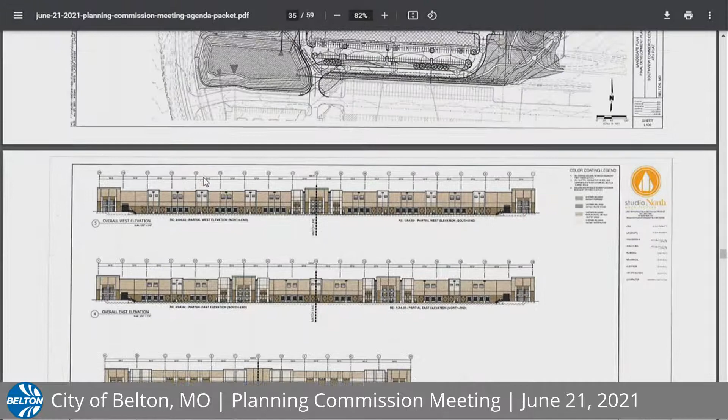The landscape plan is a very attractive portion of the final development plan. A major element is a landscape buffer on the adjoining Tract 5, which is a later agenda item this evening, but these are also integrated together - I'll talk briefly about it now. This proposed Tract A in Lot 5 provides screening and separation from the single-family homes to the east.

The buffer detail here shows the buffer meanders throughout that tract. It's a 10-foot buffer planted with evergreen trees, shrubs, and sections of 6-foot cedar fencing, essentially the same buffer and landscape design you see in other portions of Southview Commerce Center. The landscape plan also designates areas of existing trees to remain at this location as an existing natural buffer.

The landscape plan also provides required shade trees in the parking lot islands, and landscape planting around the foundations of the building. The final development plan also includes an 8-foot multi-use asphalt trail.

That trail has connections to the building. It's difficult to see here on the plan, but there's a connection here. The trail comes at this location, nicely separates the detention basin from the buffer, comes down to this location, connects back to the residential plat, which we'll talk about later on the agenda, and proceeds west, tying back into the existing trail north of Building 3. So that provides desirable connectivity throughout the office park and to the residential area.

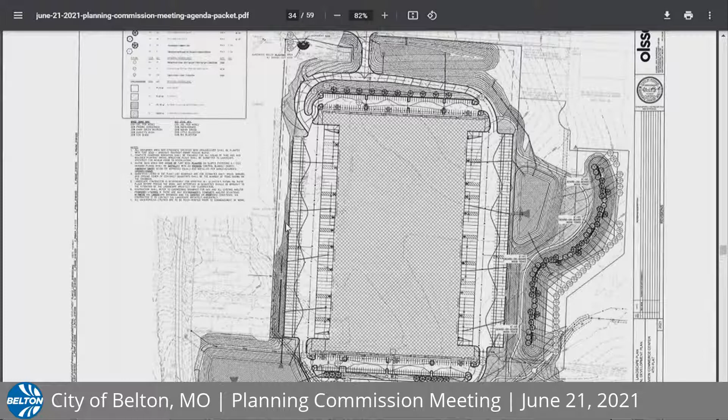Well, I got a comment. Back in—and correct me for going into the history—but back in 2018, there was the original plan for North Point.

There were 5 buildings, and there was a noise survey based on that, and they were arranged differently, now arranged as 4 buildings in a row. In that original plan, there was a noise survey report done by Kimley Horn, and they noted that Belton had required 55 dBA LEQ. That's a noise level, just like a speed limit—55 at the fence line. Their map showed that with that original configuration, the max was 53.6.

So they said we met Belton's requirement. Even though the requirement isn't in the UDC or the COO, it is a requirement. Dave and I have talked a lot about the requirement. I think it came from Olathe, and they use it only as a daytime level, not a nighttime level. Their nighttime level is 50, but be that as it may, we gave them 55. They met 55 with the original layout.

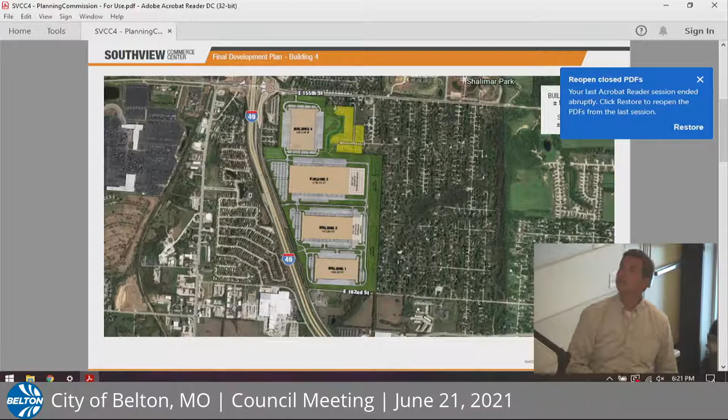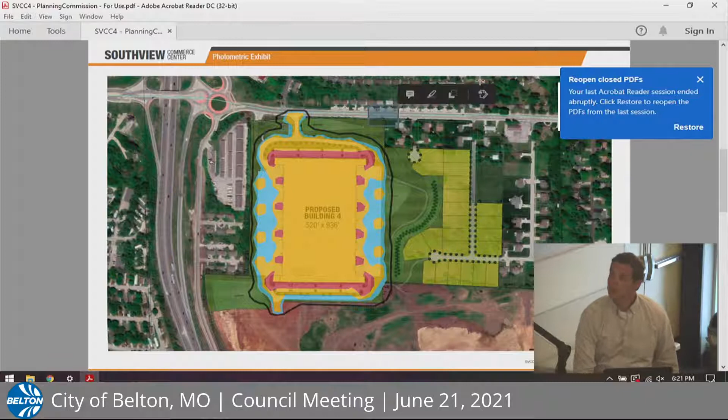Mr. Clements noted the photometric study. We presented a photometric study in response to the PDP. This is a more graphical, artistic version of what's represented by that photometric study. Let me close these things so you guys can see. The red areas are greater than 2-foot candles, on the north side, south side, and each of our building lights. Then it decreases to around 1-foot candle, and continues to drop as we approach the property line. This black line, entirely within our property lines, represents the 0-foot candle line.

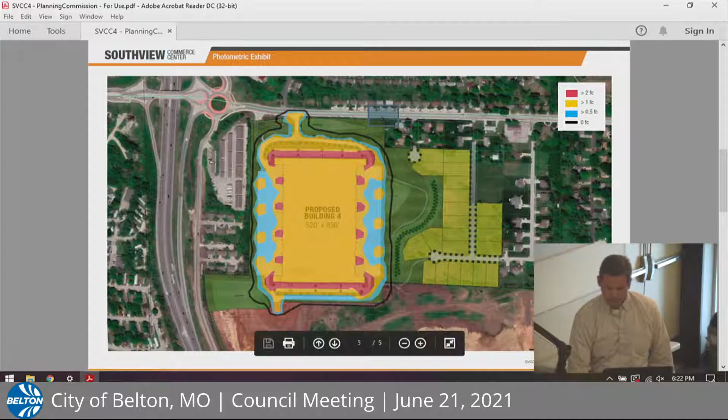So this is the plat. I don't know, Councilman, if you wanted to see the proximity, but that shows the existing situation. So, generally, to Mr. Clements' point, this is very, very similar, if not the exact same, as our previously approved PDPs, both through the commission here and through City Council. We've provided additional information regarding the photometrics, the light information on the building, and the different engineering studies for approval as well. So I stand for questions.

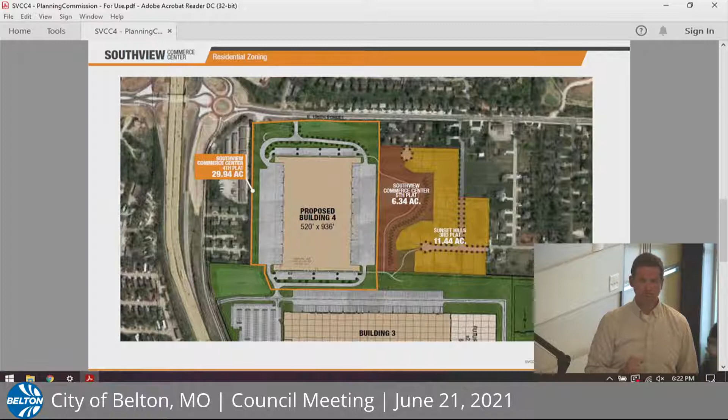You guys have any questions as well? Any questions from the commission for either the director or the applicant? I guess I have one question.

Mr. Dave was mentioning the berm there and showing where it is. I think he said similar to the other berm, but will it be at the same height, a consistent height? Because I think that's flatter property. It's a 10-foot berm with the fencing. But 10-foot berm from the existing elevation, right? Approximately, yes. We tie in the grades to make the engineering drainage work, but the goal is to have a 10-foot berm with landscaping on top and panelized cedar pickets.

And the facade of the building will be similar in structure to the other 3 existing buildings, is that correct? That's exactly right, yes. I've had some people tell me they look really nice. I think that's great, thank you.

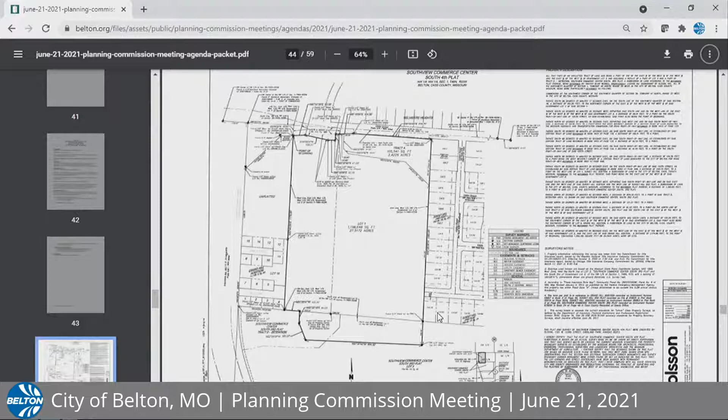Staff does recommend approval of this final plat to be submitted in conjunction with the final plan. Thank you. All right, thank you, Director. Do we have any questions, comments concerning item B?

If there are none, would entertain a motion. Make a motion to approve the final plat for Southview Commerce Center South Plat, fourth plat, located at 5901 East 155th Street and 6107 East 155th Street.

All right, thank you, Mayor. We do have a motion. Do we have a second? I'll take a second. Have a second? Any additional comments? Seeing none, may we have the roll call, please?

Commissioner Vest, Aye. Commissioner McDonough, Aye. Commissioner Anderson, Aye. Commissioner Christie, Aye. Councilman Powell, Yes. Mayor Larkey, Yes. And Chairman McPherson, Aye. All right, thank you. That motion has passed.

Moving to point C, which is consideration of the final plat for Southview Commerce Center, South 5th Plat, located approximately at 6107 East 155th Street. Director: Thank you, Mr. Chairman. This is the proposed 5th plat in conjunction with the development of Building 4 in the Southview Commerce Center.

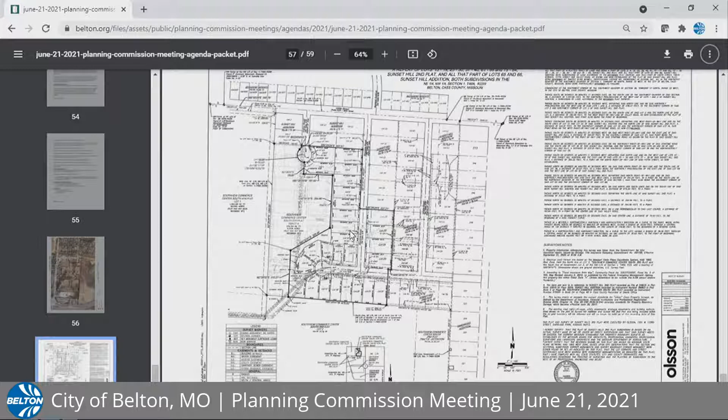I'd be happy to answer any questions. Okay, thank you, Director. In regard to people that are buying these lots in the future, what does the term buffer mean?

Well, buffer is a setback that provides a separation between land uses as a way to address adverse impact. So it's not that that's going in there to appease or satisfy existing residents -- it's actually something else, I guess. I mean, it wouldn't be a good selling point -- if I'm new to this planning stuff, maybe buffer means something else, but I wouldn't want the first thing I heard to be that my house was referred to as a buffer for somebody else.

I have no problem with this. I think that's a great way to put housing in there, but I'm just not sure what exactly we're accomplishing for the existing residents.

But that's okay, go ahead. Getting rid of that dump there. Yeah, no, but yeah -- but buffer to me means something that if I'm a buffer, I'm something between somebody over here and somebody over here, and I'm here and the dump's way over there, I guess. So, but they're still gonna have to look through the building to see where the dump was, so.